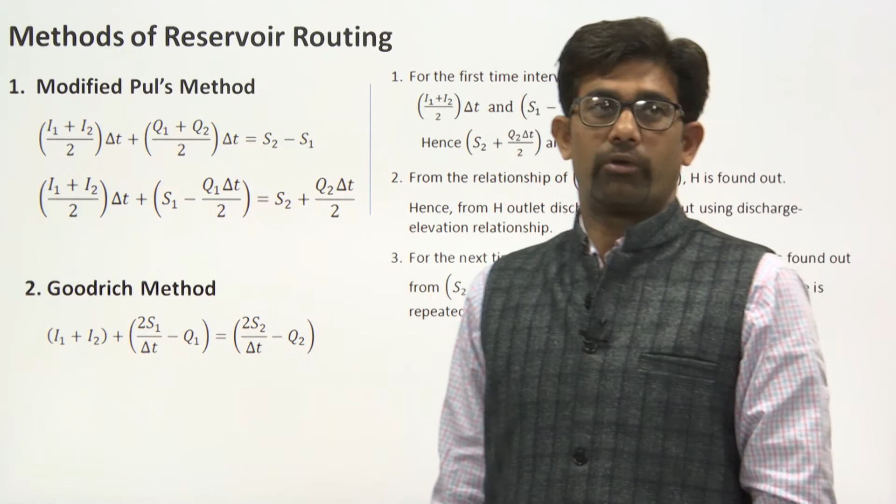Today we are going to discuss different methods of reservoir routing. The first method is the modified Pul's method, and the next one is the Goodrich method.

In the last class, I told you the basic concept of routing, and I told you that we have two cases: first one is reservoir routing, and second one is channel routing. So, in reservoir routing...

In reservoir routing, say this is the situation of the reservoir, and this is the initial water level, and the reach, it has one section, section 1, and another, this is section 2.

If an inflow hydrograph, meaning input hydrograph, is entering at section 1, then some part of the water is stored. After storing, the water is coming out from section 2. So this is input and this is outflow.

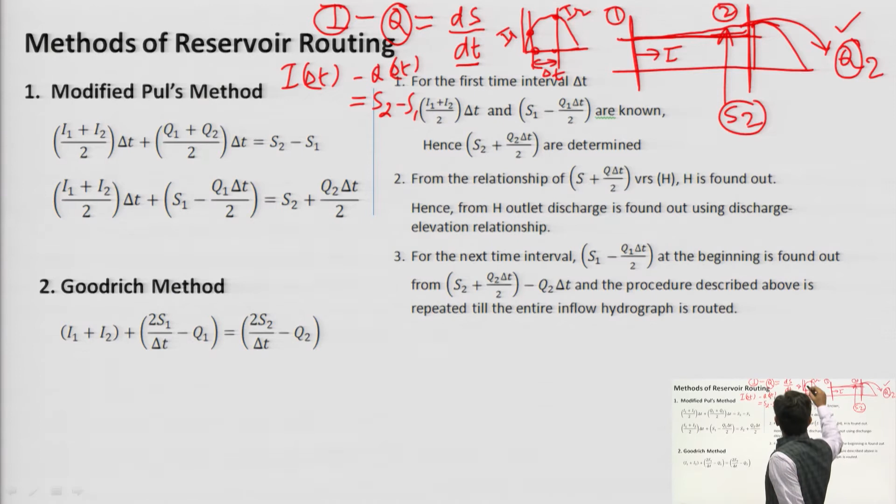Say at time t1 and t2, at a small time interval delta t. So this is I1, and this is I2, and I told you that we will take the average of I1 and I2. So this is I1 plus I2 by 2, into delta t, plus Q1.

Similarly for outflow, if this is Q, this is Q1 and this is Q2. Similarly, we will take the average of Q1 plus Q2, meaning Q1 plus Q2 by 2 into delta t.

What is known to us? The known parameters are: I1 is known, I2 is known. Input hydrograph I1 and I2 at time T1 and T2, that is known to us. And Q1 is also known to us, Q1 at section 2 is known to us.

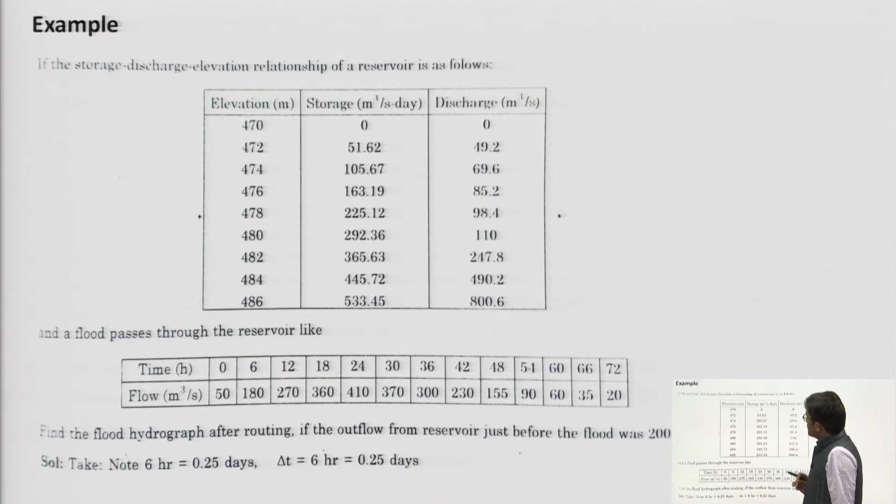This is the question: the storage discharge elevation relationship for a reservoir is as follows. In the last class I calculated this table, which was prepared through the survey data given in the question. So this is known to us, through survey this data can be prepared.

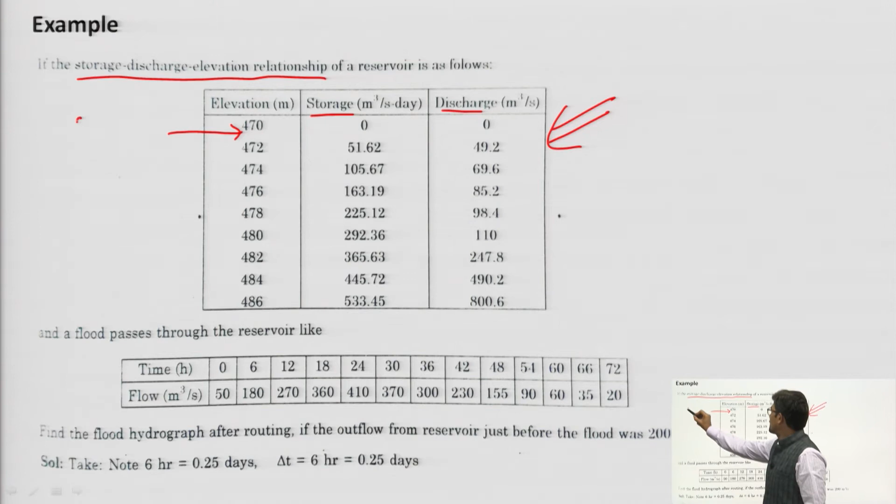Here storage is a function of H, elevation, and discharge is also a function of H. So at different elevations, say if H is equal to 470.8 meters, if we need to calculate the storage, then it will be less than 51.62, and that storage can be calculated with the help of these two ordinates by interpolating. Similarly, the discharge can be calculated with the help of interpolation of these two data. So that data is given for the reservoir characteristics.

And flood passes through the reservoir. This is the input hydrograph, the inflow hydrograph. Time and flow are given, and the duration is for 6 hours. So storage is given in days, therefore time in days: 6 hours means 0.25 days, 6 by 24 means 0.25 days.

So we will use the same steps which I told you in the previous slide. Let us make a table. We need to make a table, and in this table we will calculate this one and this one. As mentioned here, S1 minus Q1 delta T by 2, plus S2 plus this one, that parameter we need to calculate.

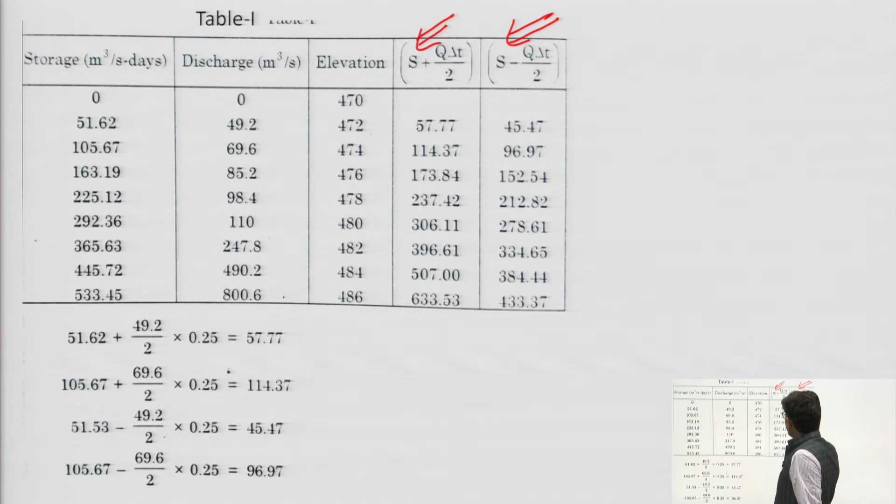And that data, S plus Q into delta T by 2, and S minus Q into delta T by 2, that we need to calculate. After calculating this, in step number 2, that data will be used.

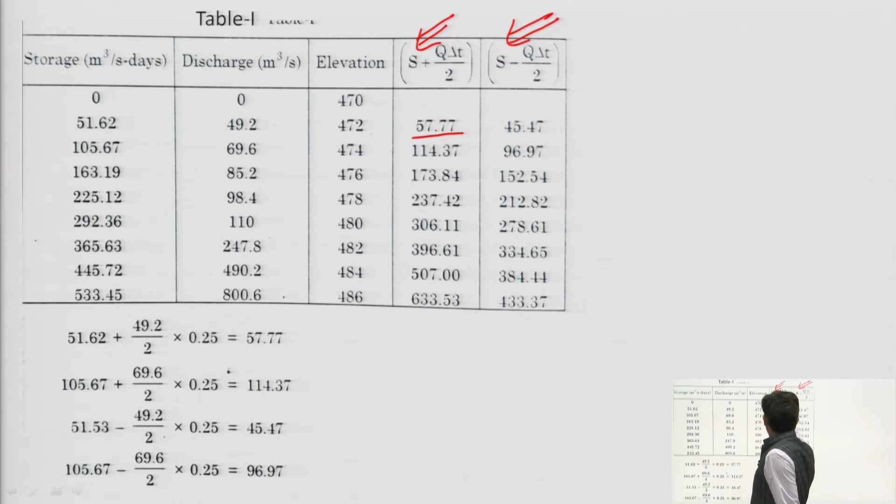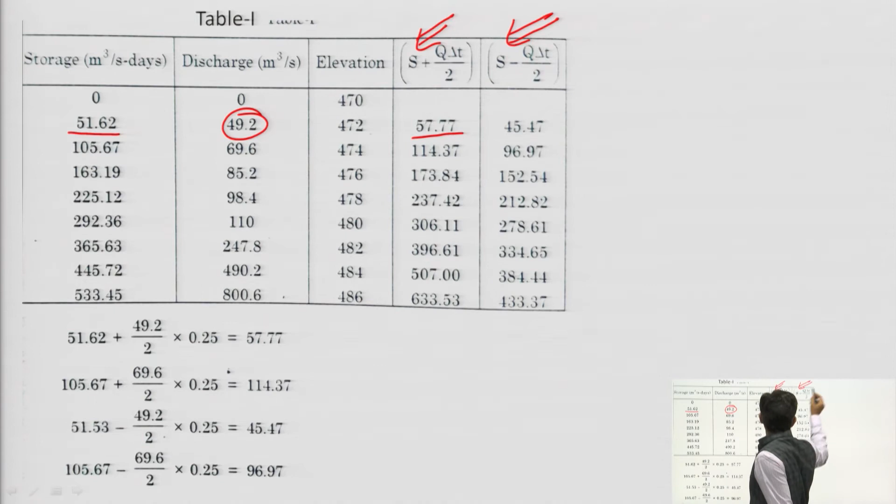So this one, 57.77, has been calculated taking S, storage as this one. This is storage plus Q, which is 49.2, delta T we know is 0.25, so with this 0.25 we get 57.77. Similarly, this data is calculated with the help of storage S plus discharge value 69.6, divided by 2, multiplied by 0.25, and we get the value 114.37.

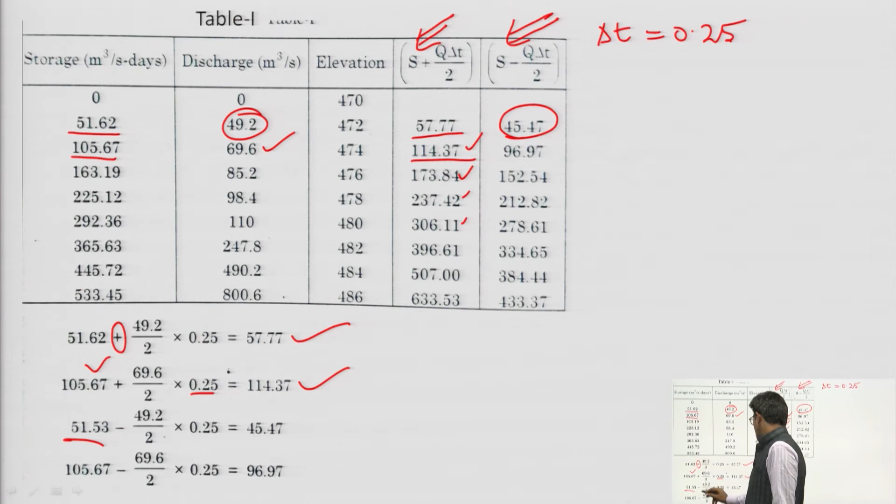Similarly, other data has been calculated, and other data can be calculated using the same procedure. S minus Q into delta T by 2 is calculated here - the only difference is minus, everything else is the same. So it is 45.47 at a different elevation, it is 96.97, and other values can be calculated in the same manner. So this is table 1.

Actually, why has the table been prepared? The table has been prepared to get the elevation at known quantity of these values. So we will make another table, and that table is according to the procedure proposed by modified Pul's method.

So this is I1 plus I2 by 2 into del T - this is the summation. Time is given, inflow is given in the question.

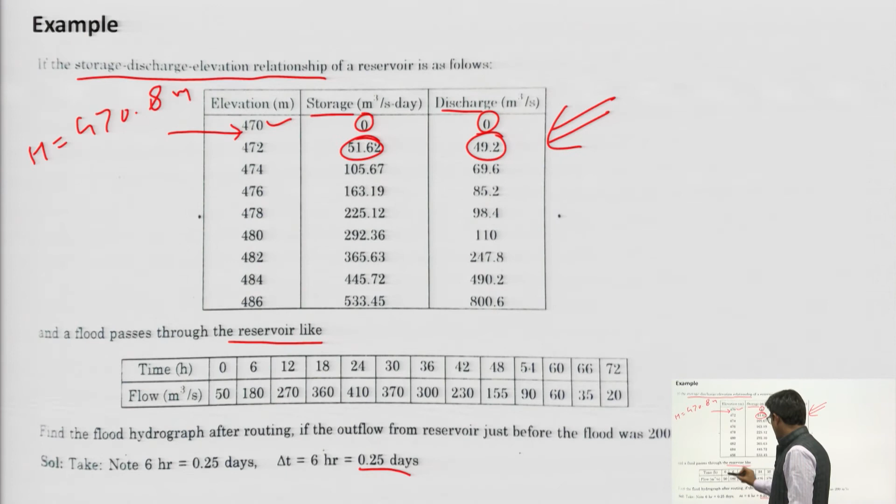At time t equals 0, what is the value? Flow is 50, at 6 hours it is 180. So that is mentioned here: 0, 50, 6, 180 and so on. I1 plus I2 by 2 into del T, then S1 minus Q1 into del T by 2.

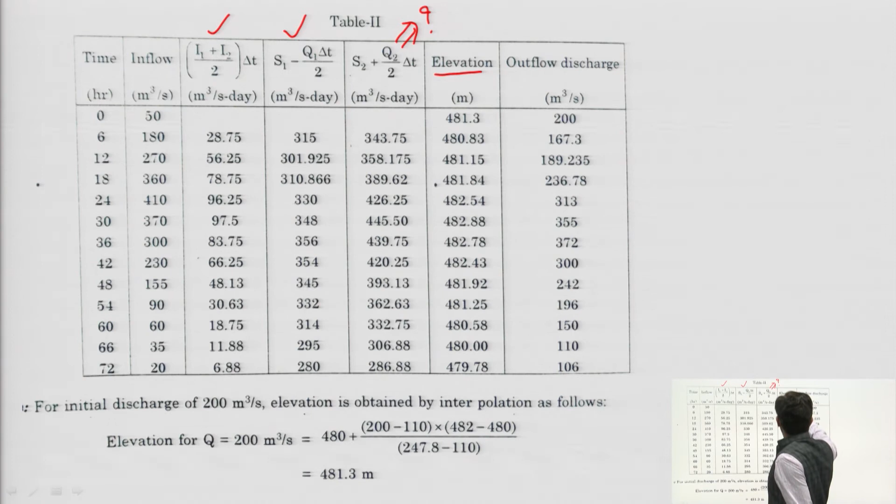So this parameter is known to us, and S2 plus Q2 by 2 into del T, that we need to calculate. At different elevations, that has been calculated with the help of the elevation. Once the elevation is known to us, the discharge can be calculated.

Let us see how different values have been calculated. First of all, consider this value 28.7 - it is simply I1 plus I2 by 2, meaning this is 50, this is inflow, I1 value is this, I2 value is this, divided by 2, into delta T. Delta T here is 0.25, so you will get this value.

Similarly, 56.25 - I1 and I2 will be this value, for these two values you will get this one. S1 minus Q this value, S1, that value will be calculated - S1, this is the storage at section 1.

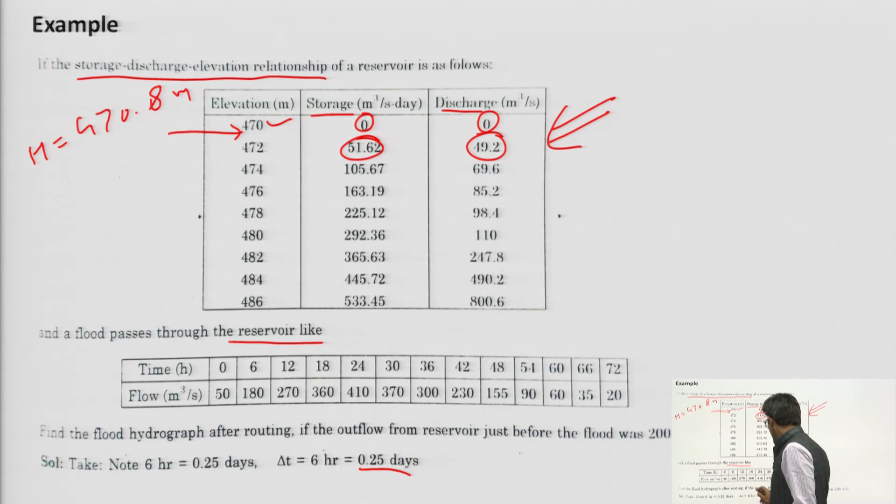So in the question, find the flood hydrograph after routing. The outflow from the reservoir just before the flood was 200 meter cube per second. Find the flood hydrograph after routing if the outflow from the reservoir - meaning the value of Q1 is given to us, Q1 is equal to 200 meter cube per second, and at this discharge, this will lie here.

So here we need to calculate the elevation at this discharge, and that storage needs to be calculated. So the elevation at this discharge has been calculated as 481.3. This is the elevation, and the value is this one.

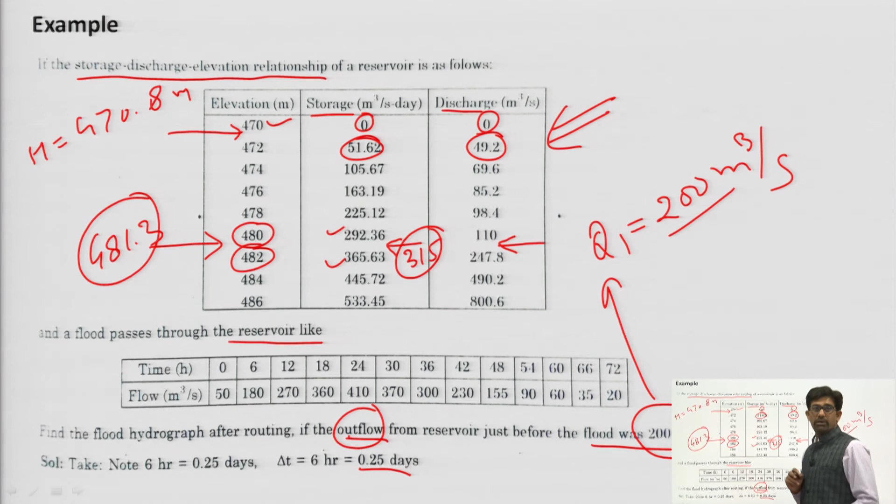These two values have been calculated for Q1 equal to 200 meter cube per second. So this data has been calculated, and 315 has been calculated by interpolating.

At this point, if we know this value, then S2 plus this data is the summation of these two. And if we know this value, then elevation can be calculated.

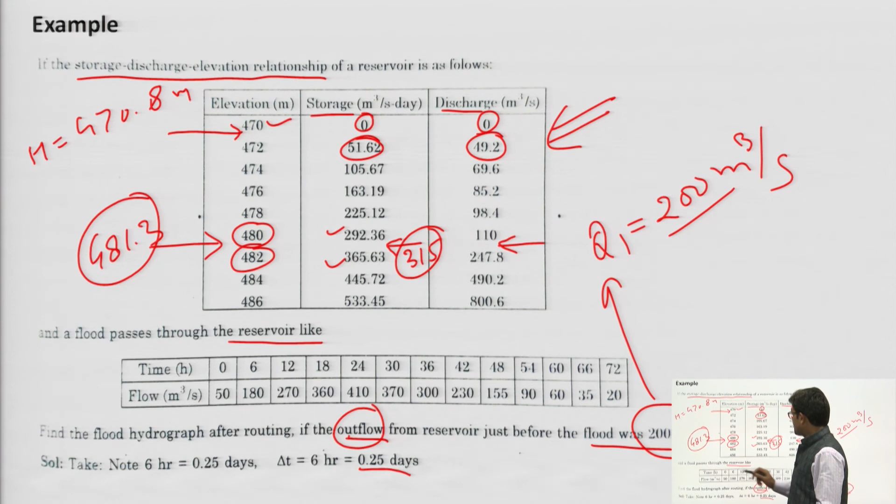That elevation at that storage — what will it be? Elevation is this one, 481.3. So at this storage, elevation is this one.

Elevation — again we will calculate the elevation. So we will get 480.83 by interpolating. And at this elevation, what will be the discharge? By interpolating, we will get 167.3, as explained here.

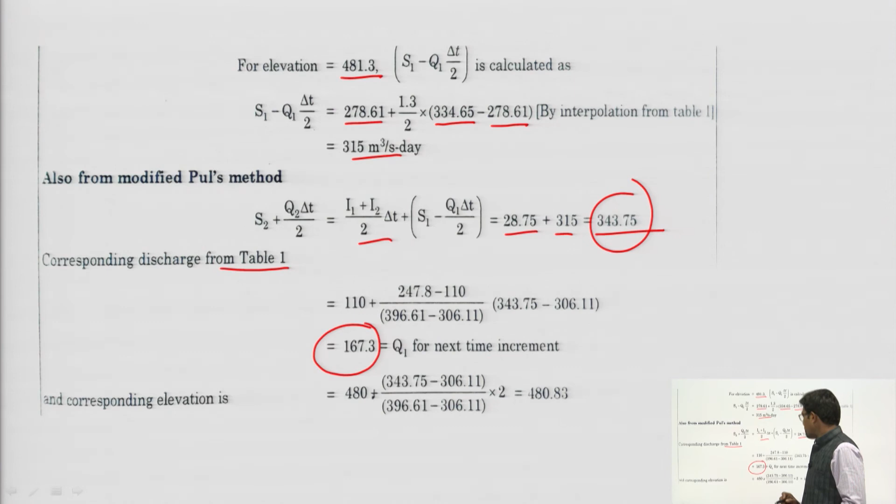From the modified Puls method, S2 plus Q2 into del T by 2 — this has been calculated, and the corresponding discharge from table 1 is linearly interpolated, and we got 167.3.

Next we need to find this value, 301.925 — how will it be calculated? This is step number 3 that I mentioned. We did step number 1, we did step number 2, now we need to do step number 3.

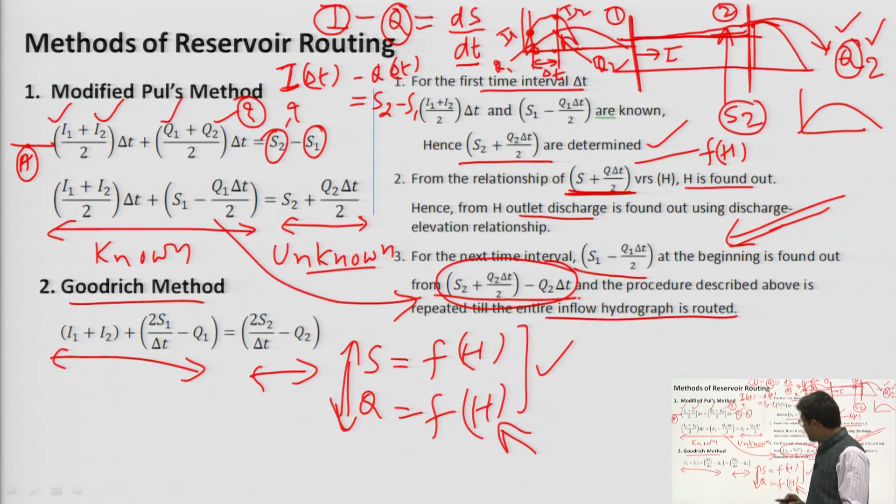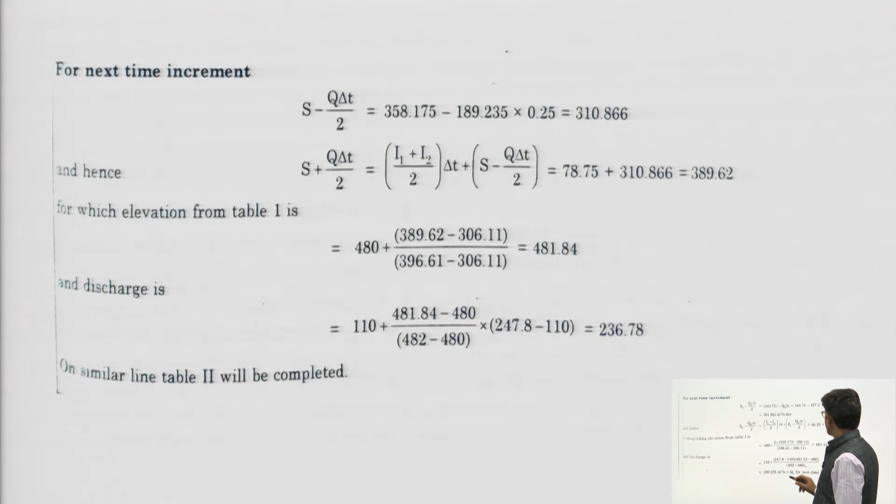Means S1 minus Q1 into del T by 2 will be calculated from S2 plus Q2 into del T by 2 minus Q2 del T. From here that parameter will be calculated, giving us 301.925.

This one, S1 minus this parameter, has been calculated. Previously we know this value minus Q2 into del T has to be subtracted. And what is this value? 343.75.

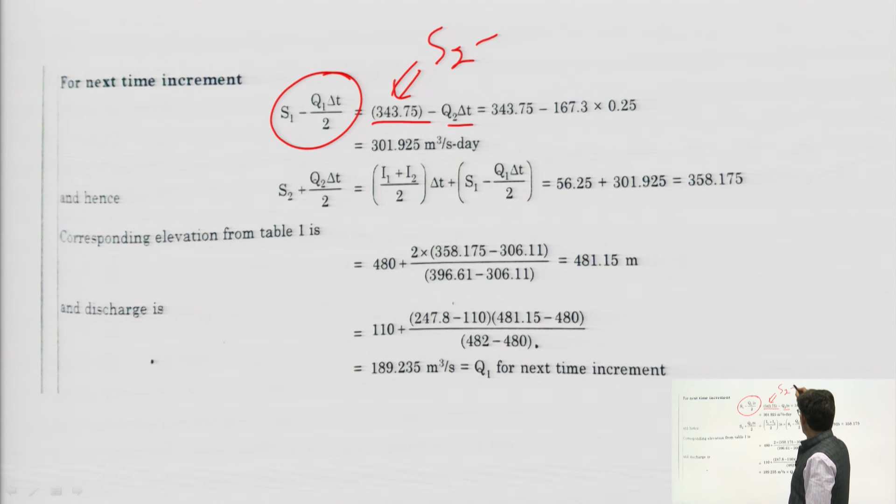343.75, this value — S2 plus this one. So this is S2 plus Q2 into del T divided by 2, this value minus Q2 into del T.

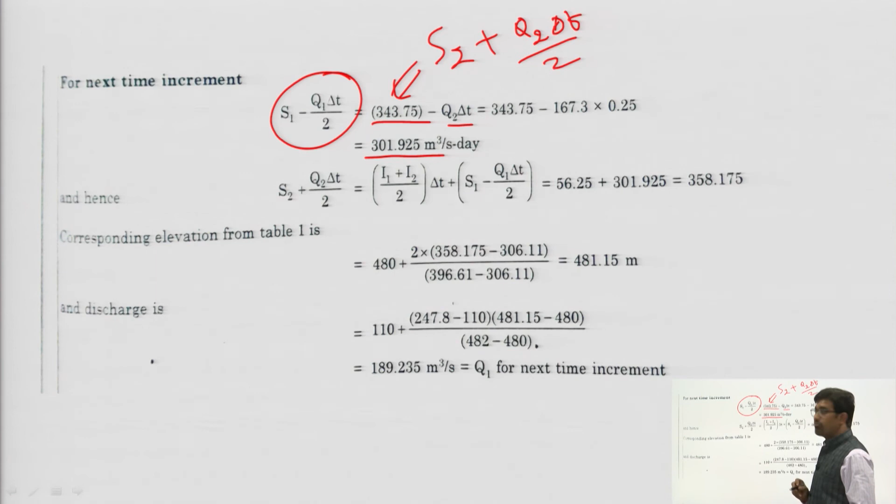301.925 — that is calculated. So this is the value.

And by knowing this, this column can be calculated by simply adding these two, 56.25 plus this one. So then we will get 358.175.

Once this data is known to us, we need to find the corresponding elevation from table number 1, from this column we will know the corresponding elevation, which is 481.15. Once we get this elevation, the corresponding discharge can be calculated.

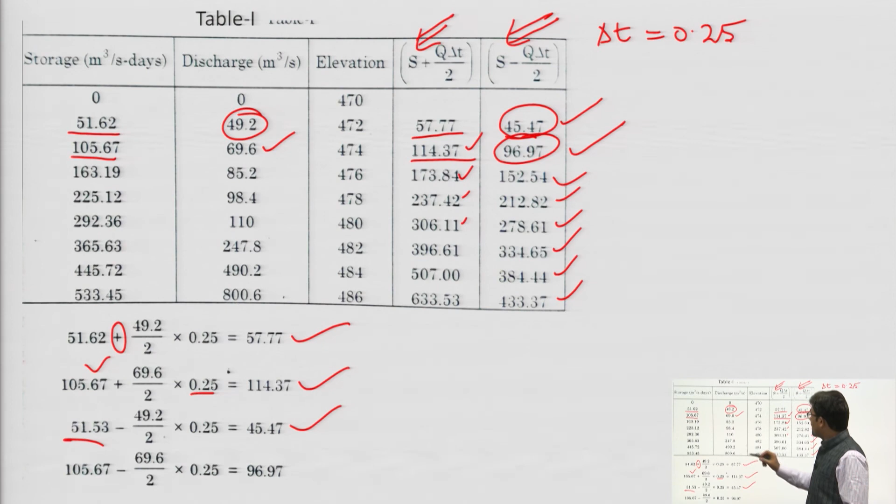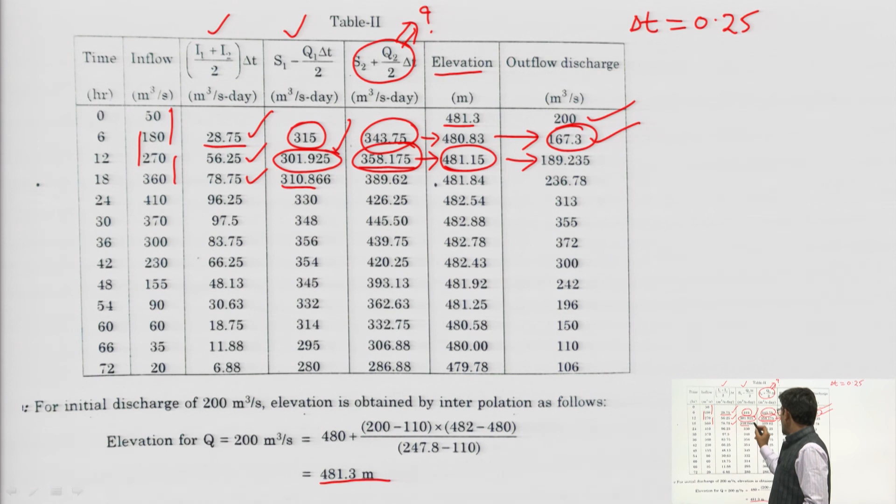Corresponding discharge from this one and from this one, by linearly interpolating all the data. Then in the next step we calculate this, which will be the summation of this plus this. From this data we calculate the elevation, and from table 1 we calculate this again. This is the procedure to complete the table.

So this is the inflow and this is the outflow. So the flood has been routed.

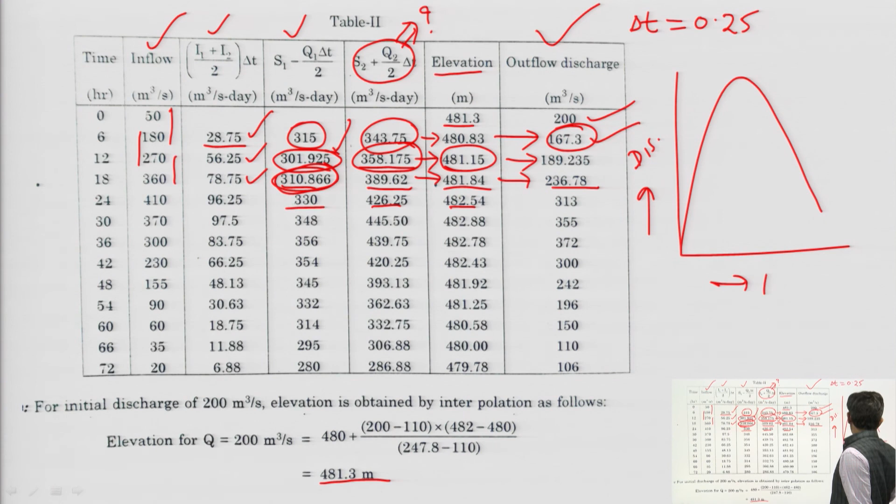Now we can make the plot of the input hydrograph — this is the discharge versus time, and we will have this type of curve. So from this peak we can calculate the attenuation, and the lag time can be calculated.

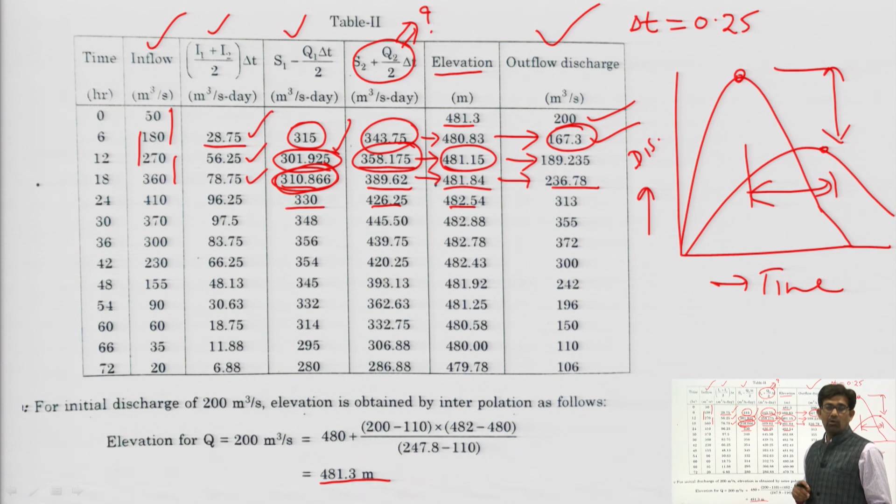So this is the procedure for how the flood can be predicted in a reservoir.